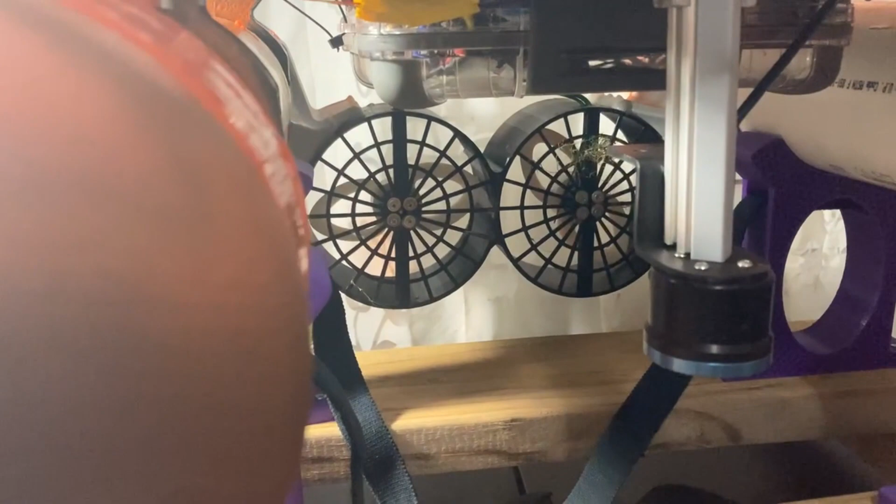You can watch the older videos for all the technical details, but the short version is that it's solar powered. It runs on 2 brushless motors in the back, steers with differential thrust, has a sonar module to map the depth, and it navigates based on a GPS and compass signal to follow predetermined waypoints that are stored on an internal SD card. And it also uses that SD card to log all the data as it goes.

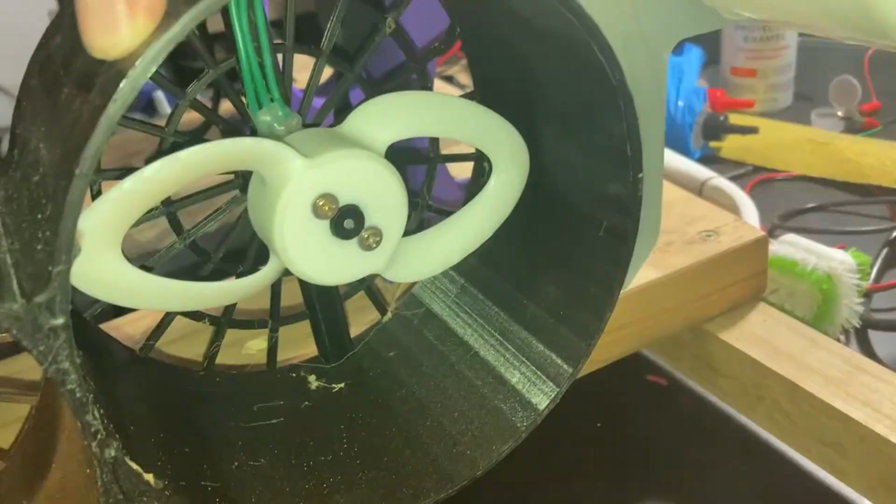The only real hardware changes since last time are that I've painted it orange. I put a slightly better camera on the front to get some better onboard video. It's not waterproof, but it's cheap enough that I'm not that concerned about damaging it, and it's powered by this battery pack. Also, I've replaced the propellers with these toroidal ones. I've got another video about how I optimized this propeller design.

They are 3D printed. And all this is just a transportation stand I built to strap it down and not worry about it bouncing around in my truck. Other than that, the rest of the hardware is all the same, but I have made some significant improvements to the code, and all this software is open source, and I'll have a link to it posted somewhere.

Here I am about to launch the boat. I tend to just plop it in the water from a public boat ramp, but really it can be anywhere. Ideally just somewhere uncovered so it has a GPS signal from the get-go. And unfortunately I couldn't film and put it in the water at the same time, but here it is taking off. This is real-time speed. It's fairly slow, so most of the clips later on are going to be sped up. Just keep that in mind. But next I'll go into the time-lapse from the onboard camera and kind of discuss some background as that plays.

This is the time-lapse footage. It's about a 60x speed, so the mission was a little bit under 2 hours, and this is condensed down into a little bit over 2 minutes more or less. And this footage is stabilized in post-editing, so that's why it kind of looks like the pontoon on the right is moving in and out there. The camera's actually fixed onto the boat. That's just a consequence of the stabilization.

But anyway, so this boat, like I said earlier, it's a dual pontoon setup. The pontoons are made out of PVC pipes. It's got 2 brushless motors, steering with differential thrust, non-reversible ESCs, so it's forward only with the differential thrust. It's powered by a 12-volt solar panel, and that feeds into a 12-volt lead-acid battery, and that battery's about 2 amp hours.

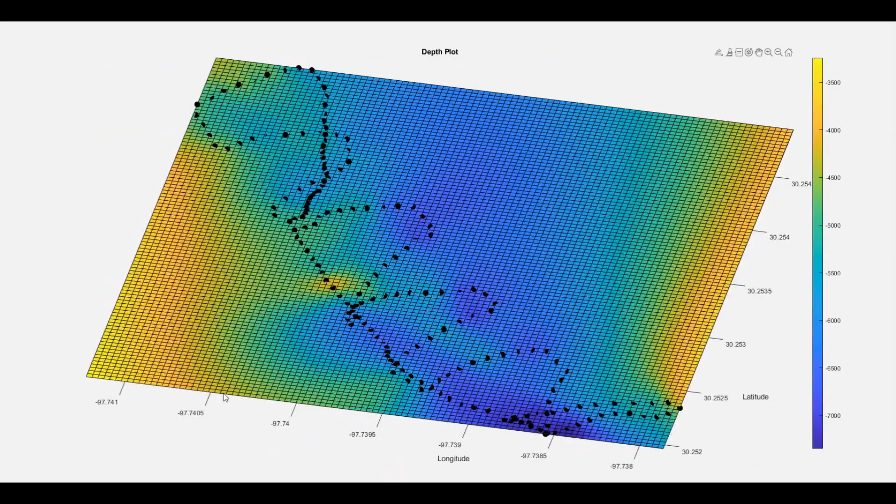By the way, that beeping you might hear in the background of some of these clips, it's my radio transmitter I've got in the kayak with me. It beeps when it hasn't received any inputs at all after a few minutes, and I'm not actually using it to do anything with the boat. I just have it with me in case I need to take over manual control to steer around a paddleboard or something. But fortunately, I did not need to do that. It stayed in autonomous mode throughout the entire duration of these almost 2 hours during this mission.

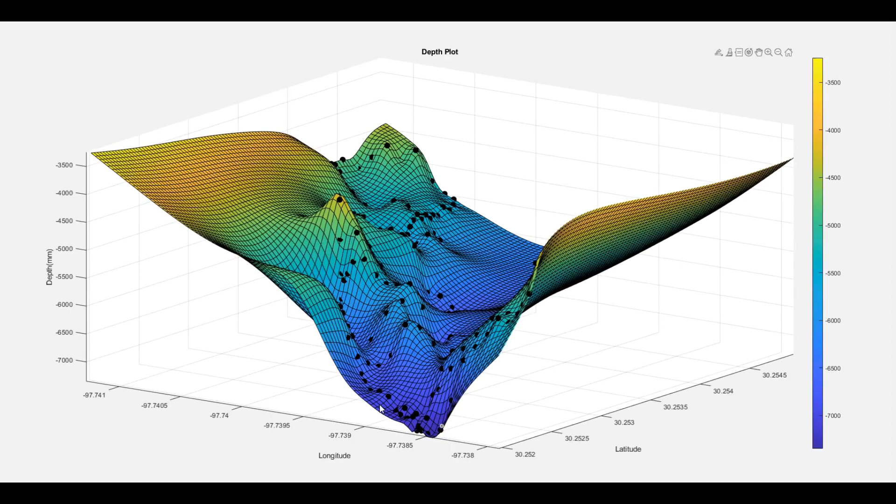So the depth scale is in millimeters, and the deepest points it measured, a big cluster of points right here at about 7.5 meters. That's roughly 25 or 30 feet or so. And it seemed to be traveling kind of right along where the deepest part of the lake was, up through where it slopes up to the shore near this side. I should have made it go a little closer to the shore on this side because it didn't really catch any points sloping back up this way, but I was trying to be real conservative with it, not wanting to beach it or crash it into anything.

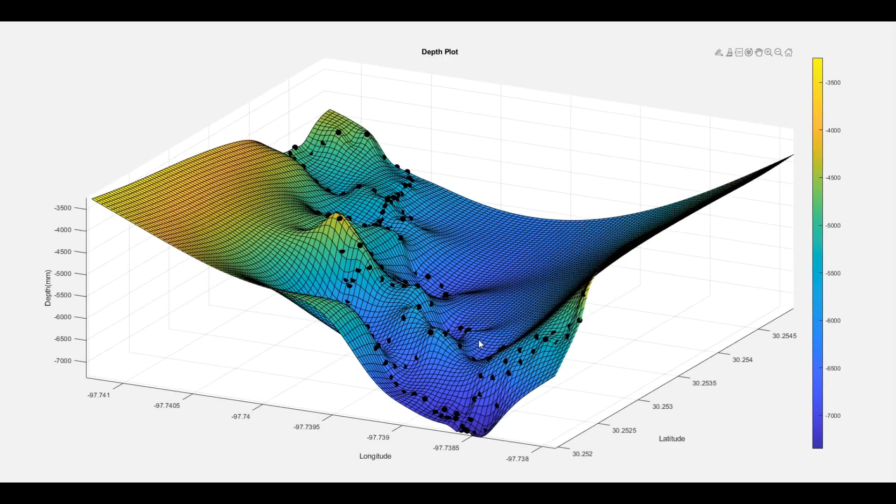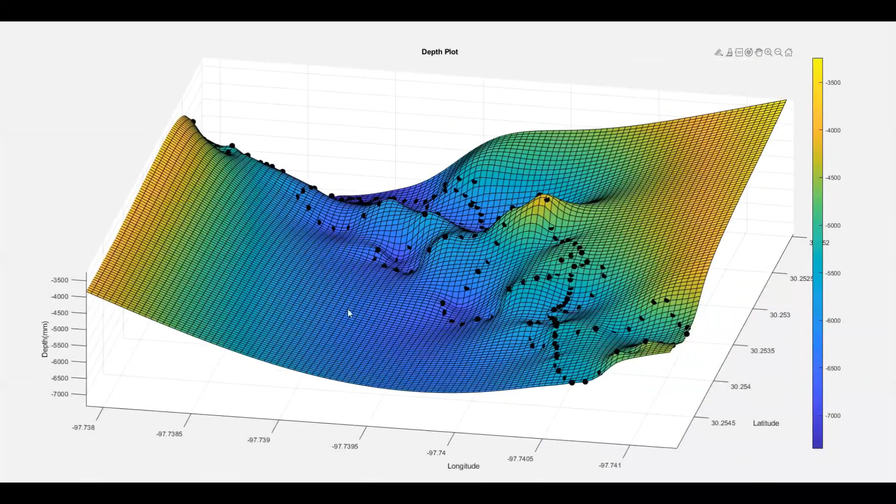This is definitely the coolest map that I've made with this robot yet. I'd really like to come back and do more missions in the same area, and I can combine all the data together and make a bigger map with a lot more data points.

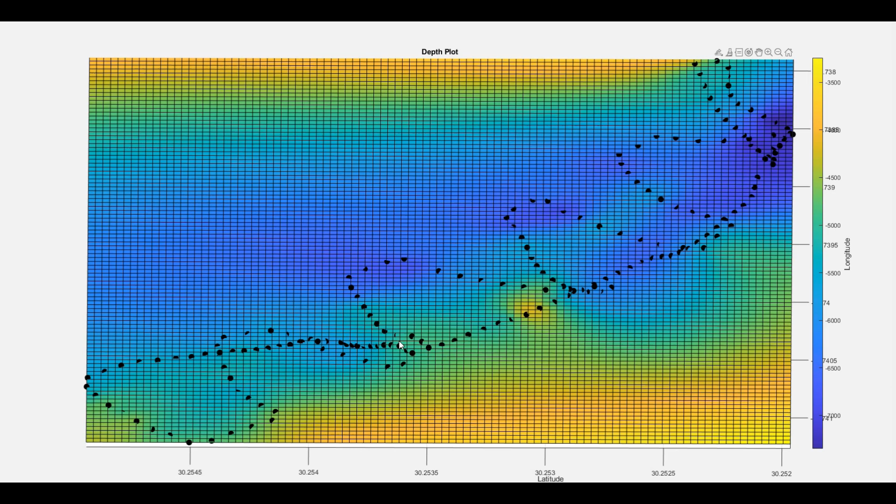So I did truncate off some of the points at the start because the depth was basically 0 and it threw the scale off all crazy. But it started up here and then zigzagged back and forth across the lake, and then once it got to the end, took a more or less straight line back this way. And you notice this area here where all the points are really close together. So these points are going exactly every 30 seconds. So you can tell it was moving slower there. That's actually where a piece of weed got stuck in the propellers.

This upcoming clip has some good footage of it taking a turn, just to give you an idea of what the turning radius is on this boat. It turned out to be better than expected for having a differential thrust steering with the props so close together. The props are 6 inches apart, center to center, and they are shrouded, so when one's not spinning, there is quite a bit of drag from the shroud on that side.

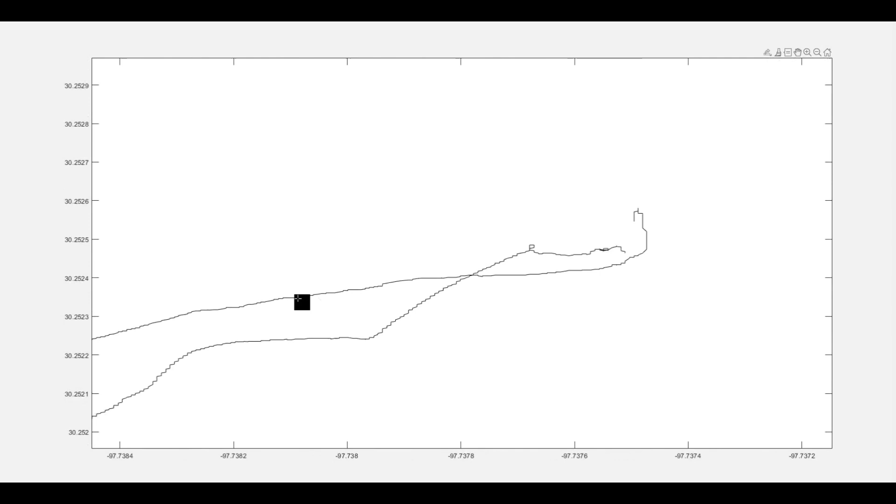Here's the raw GPS data for the path it took, latitude, longitude. Probably isn't to scale, but just wanted to show off the resolution here. So this was a sampling rate of about once per second. So this is the start, plopped it in the water, taking a GPS coordinate about once a second, on to the zigzagging path, and then turning around and coming back at the end.

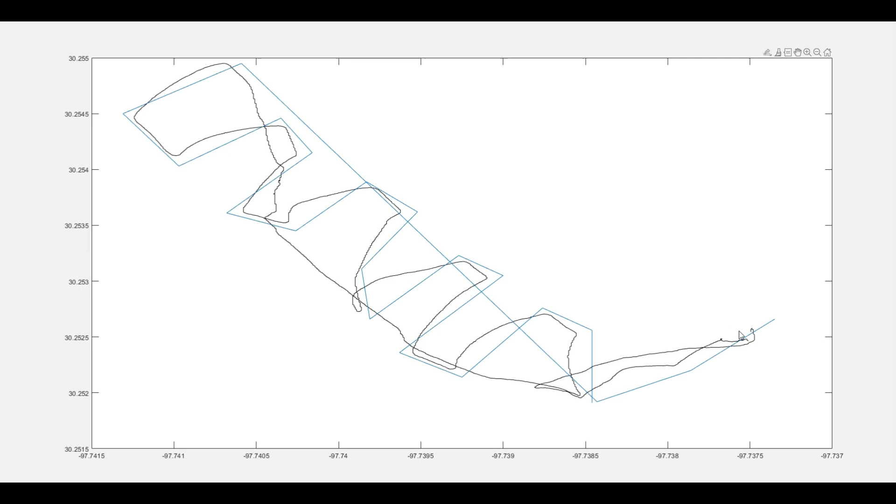In this plot, I've overlaid the planned coordinate path with the actual measured GPS location. So the blue line is just a straight line as the crow flies between each GPS coordinate. The first one is right here where my cursor is, and the boat actually started out on the shore about over here. So it was supposed to kind of zigzag along just like this. And there's a couple interesting things to point out here. In particular, you can see it well with this leg.

So this should have been a roughly straight line from this point to this point, but the boat kind of went for an outwards curve, and then the further along it got, the sharper that slope became back towards the point. So what's actually happening here is there's a strong crosswind coming from this direction. So when it's far away, the wind is slowly blowing it off course, but it's always correcting its course with the compass data. So the more it gets blown off course, like as it gets to over here, it turns back in towards the point. So it kind of started turning left there.

As the code is right now, it does not make any correction whatsoever for wind, current, things like that. It just always points itself towards the next point. So that's why we end up with these curves instead of straights. You can see that happen to a lesser degree on just about every one of the straightaways in this direction. And you'll notice the curve kind of goes the opposite way when it's heading back and the wind is coming that time from its right.

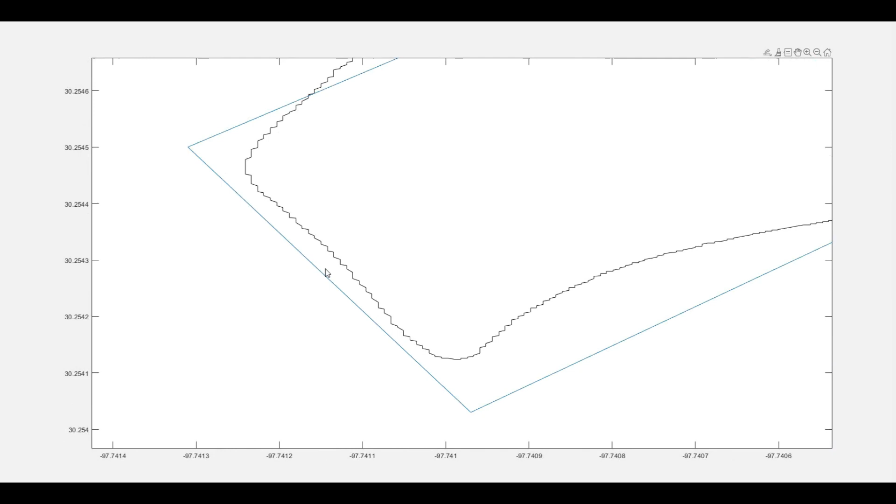You'll also notice on the straighter sections like this one, where it's pretty much going straight downwind, it keeps a straight line pretty much perfectly with the plan there. Same thing here and here, because then it's not in a crosswind. And it does have about a 10-meter tolerance for the waypoint distance, so that's why it starts turning before it's actually reached right on top of the waypoint.

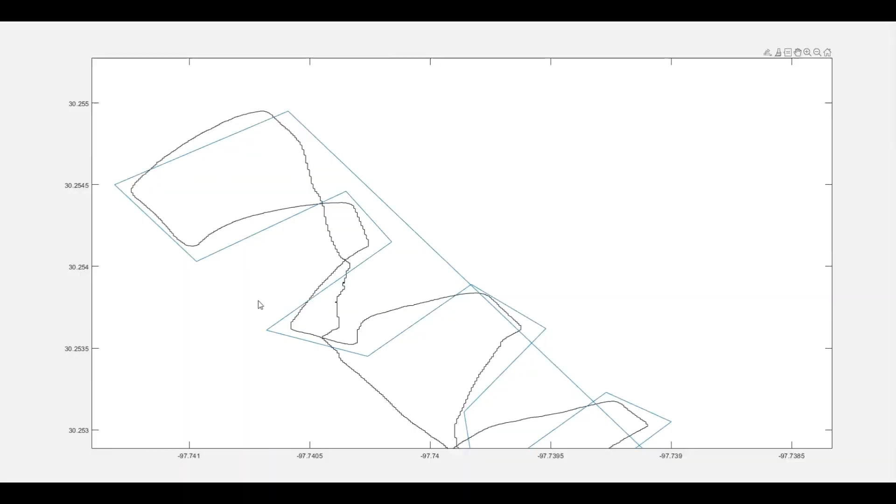When it got to this final point, it was supposed to make a straight line all the way back there, but you can see it kind of went crazy and veered off to the right kind of sporadically. And this is around the right time where I pulled a bunch of seaweed off of it, so I think what probably happened is that caused some uneven drag that made it lose its steering authority, and it went all the way over here to where I actually got the seaweed off, and then it corrected and went pretty straight the rest of the way.

Here's a side-by-side with the Google Maps screenshot of how I actually picked these points out. I basically just pulled up the satellite image, clicked on the map, and typed the GPS coordinates into my SD card. Over here, this boat ramp is where I actually launched from, and I did end up adding a couple more points after I took this screenshot, so that's why there's some extra over here and up here.

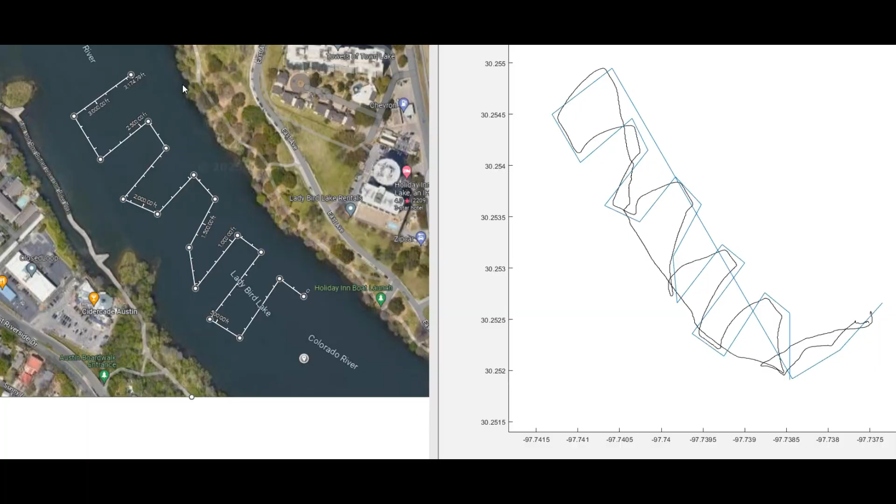Here's that same line kind of poorly transposed onto the actual satellite image. You'll have to bear with me, I'm an engineer, not a photo editor.

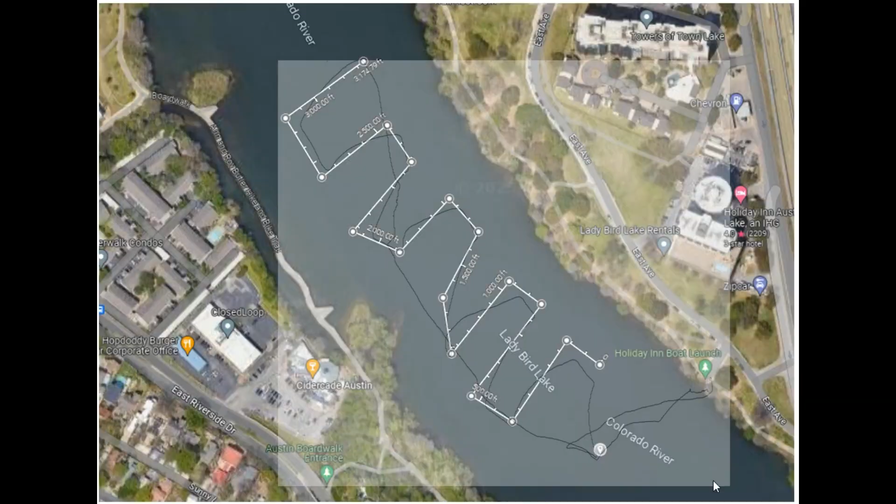These graphs show the data collected by the power monitoring sensors. This top one is the current draw. So the blue line is the total current draw from the motors and the entire system, and the black line is the current produced by the solar panel, both at 12 volts.

So interestingly, the solar panel power is very straight and consistent, and you'll notice it trends linearly downwards as time goes on. That's because later in the day the sun is setting and the incidence angle gets worse and it produces less power. This was filmed and this mission was done from about 5 o'clock to 7 o'clock in the evening, so I'm confident that could have been a lot higher if it was done around solar noon, and I'll definitely aim for that next time.

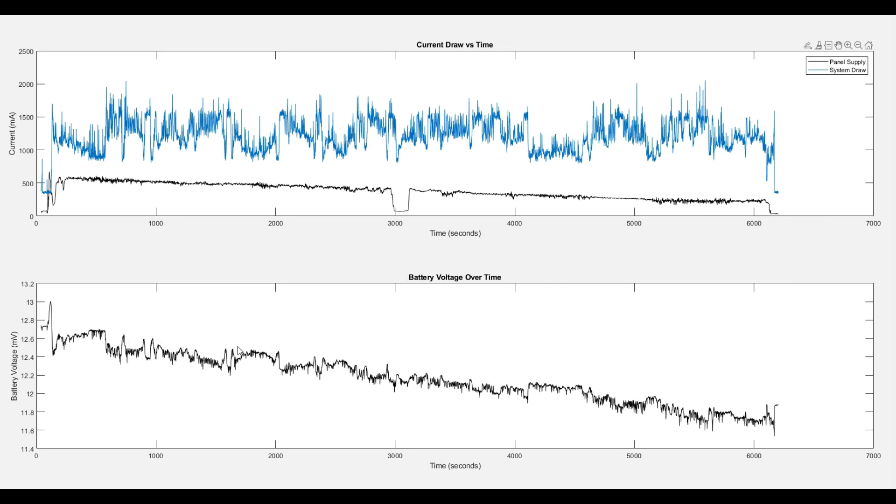So even if we're still net consuming rather than producing power, the solar panel is still helpful to extend the overall duration of the battery life just by supplementing it a little bit. And I thought I'd add the reason this voltage and the current both are so jumpy everywhere is because the motors are constantly making adjustments and changing speeds.

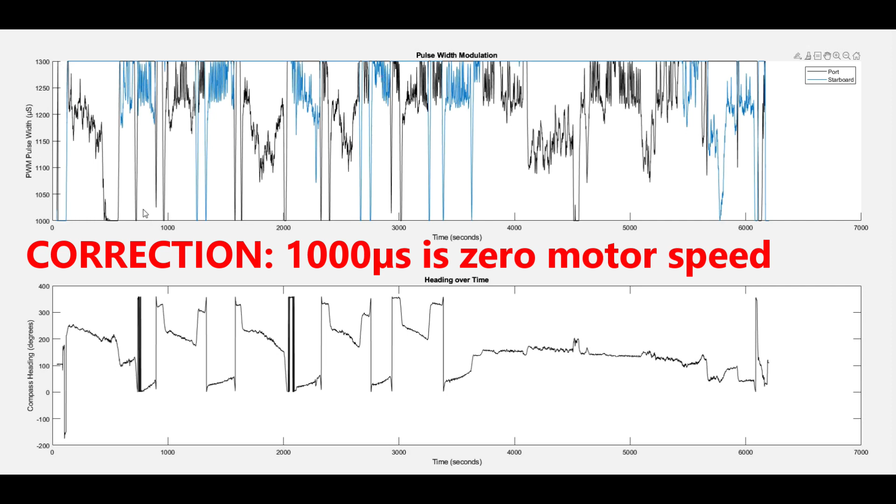So these spikes down to 0 are when it makes a sharp turn and it completely turns one of the motors off. You'll notice that always coincides with one of these sudden changes in the compass heading. That's because the compass heading jumps quickly as it makes a sharp turn. Some of these spikes look a lot bigger than they really are because when it hits 0, it loops back around to 360. So that's what's going on there when it makes turns in the same direction multiple times in a row.

And then you'll notice these sections that kind of gradually slope down. That is from, as I discussed earlier, when the wind was blowing it off course, and the heading is just slowly changing as it constantly readjusts to be pointing towards the goal. I wish that I'd also tracked the goal heading on my black box. I don't have real live data from that. It would be interesting to see the actual heading, which is what's shown here as measured on the compass, side by side with the goal heading to see how well it's keeping up with that.

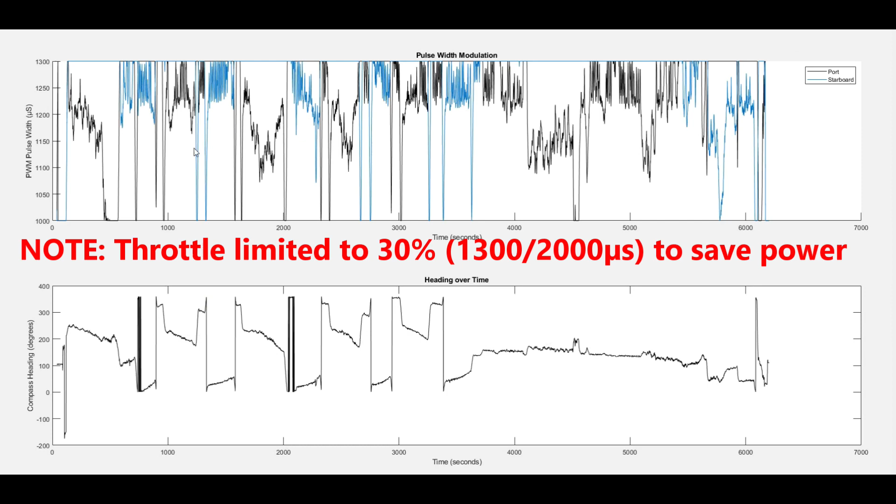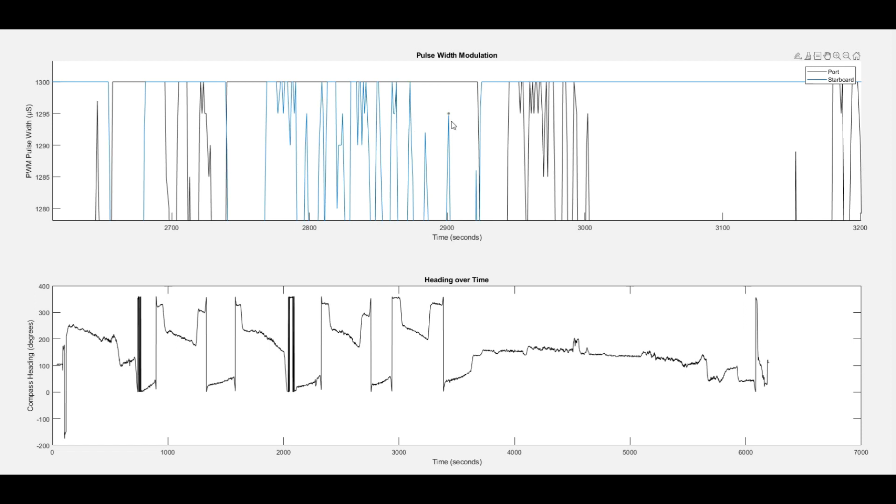But you'll notice in the pulse width modulation, if I zoom into one of these brief straightaways, it'll have one motor pegged at 100%, and it's constantly making very small adjustments with the other one to keep it on target, and it doesn't actually spend very much time with both motors at 100%. The reason it's making all these tiny adjustments so frequently is just because my steering gain wasn't set high enough.

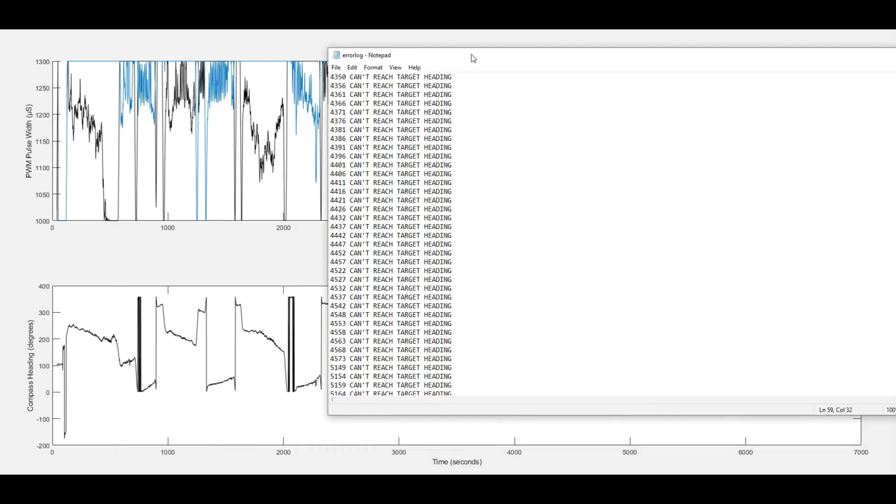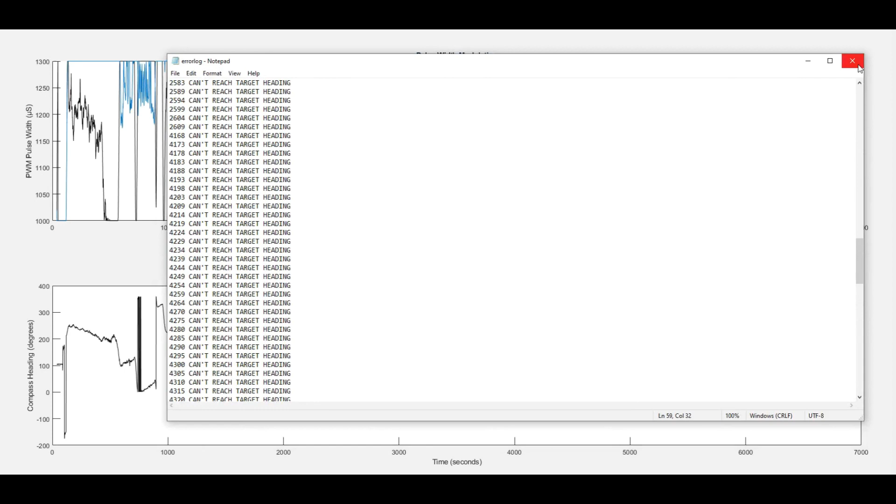And if you look at my error log here, it gave this "can't reach target heading" a lot throughout the entire trip. That occurs if 5 seconds pass and the actual heading is not within a few degrees of the target heading. So the reason for that is because the steering adjustment is not enough to significantly alter the heading quick enough, and so it doesn't quite reach the point where it keeps both motors at 100% because it's constantly struggling a little bit to reach the target heading.

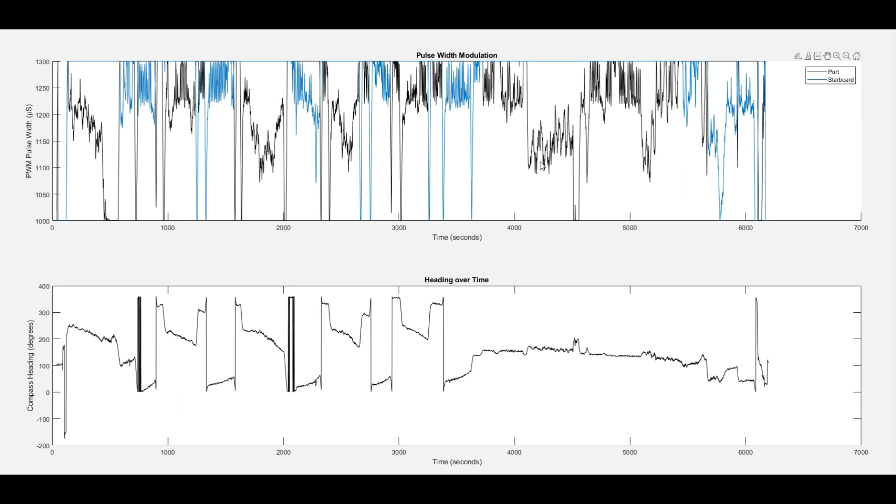The strong wind was also a reason why those adjustments were made so frequently. Even though the wind doesn't necessarily rotate the boat itself, it translates it relative to its target waypoint, and so the target heading is constantly changing a little bit in the event of a crosswind.

The steering setup is not true PID control, it's proportional only. So if it gets to a point where it's struggling to reach the set point, like it did a few times during this mission, it just kind of reaches an equilibrium a few degrees off and is constantly making minor little adjustments but never quite fully reaching the goal.

So definitely by the next major mission, I'd also like to add in integral and derivative control. And that, combined with the use of the GPS course, the actual direction of travel, instead of just the direction it's pointed in for some of the calculations, could, I think, really help it with the steering in the high wind conditions.